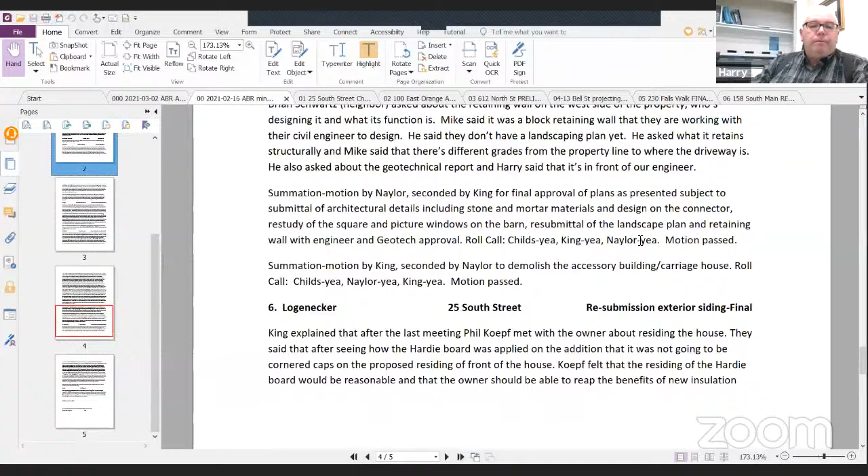Okay, resubmission 25 South Street, our siding issue. I have no new information on this. Hopefully folks had a chance to get down there and take a look at it.

I walked around it with them, and they're very nice people. They bought an old house and really don't accept that to a great degree. There are some problems with the siding, some rot that I saw. I don't think we have a picture of the rot that I saw, which was on the southeast corner. Yeah, I don't know if I have that up. Yeah, I don't remember a picture of it, but it was there when I was viewing it.

There's some peeling paint. The issue that bothers the owners primarily is the paint, the repainting and the seeing of previous paint jobs, and not the greatest job anyways.

I feel the need to enlarge on this because there are several questions here. Historical significance is determined by the Architectural Board of Review and nobody else. We get input from other sources, certainly prospectus, but we determine what is historically significant and what is not. I will say, and as I did in a letter a week or two ago, each dwelling or submission is an entity unto itself. No two are alike. It should be treated as such.

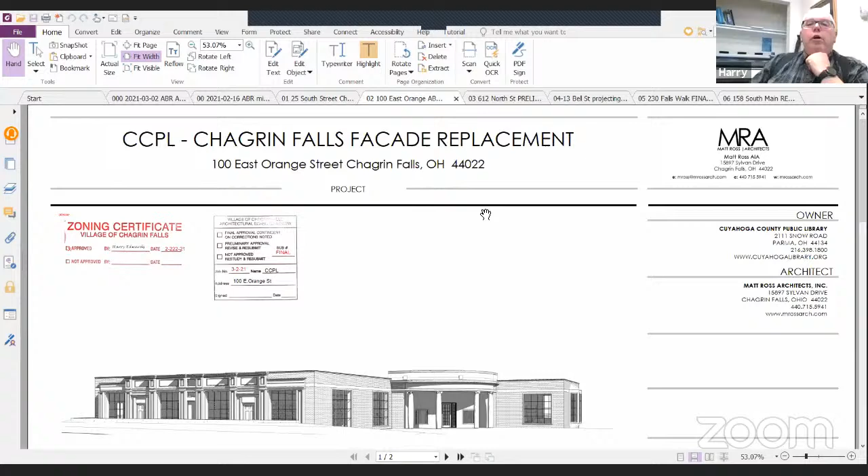100 East Orange Street, the library. Good morning, everyone. Good morning. Morning, Matt. So not much really has changed. I'll just kind of go through the project again to refresh everybody's memory.

The north facade of the library — over the years we've tried to paint it, remove the rotted wood. It just kind of keeps coming back, largely due to a lot of moisture in that area. And it does not get the sun like the rest of the building does. So we want to replace that in kind, identically, with the AZEK PaintPro, so we can paint it to match the existing.

Library standard, and they're going to be painting the rest of the wood trim as well, so we're going to have a match. I did approach the library about your wishes about replacing as much as possible. It's just not really in the budget right now. Over time they would like to — that's the plan.

What do you mean by replacing as much as possible? Replacing the wood trim with the AZEK, other than the north facade, on other parts of the building. Visually, it's not going to be distinguishable. So I mean, I think that's really up to them and how they approach it over time. If it's not rotting now, keeping the older wood seems like a fine plan for the moment.

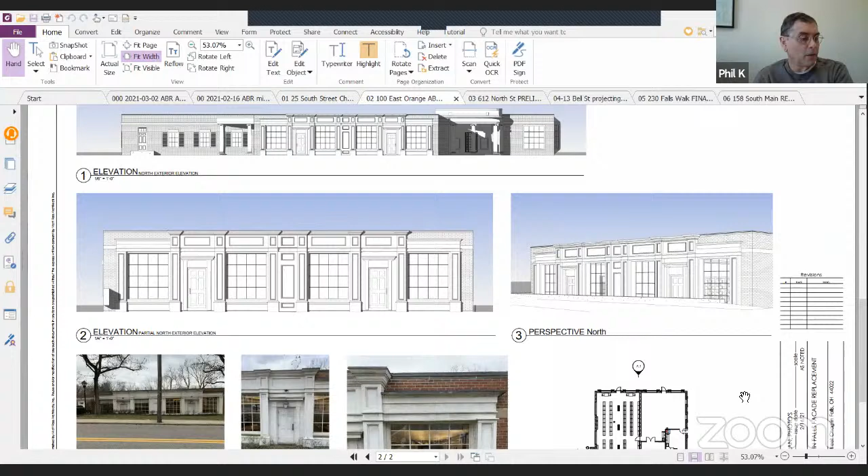I remember when Holtzheimer designed this, and thought it was way overdone, but in order to match it, I don't think you can do it in AZEK. I think you're going to need to do it in Boral trim that's custom made, or come up with some details so we can see sections through those pilasters and through the cornice. I don't think the sills are all that important, because it looks like it's original. Yeah, the windows were not going to be part of this, or the doors, just any trim surrounding it. I agree with Phil's comment.

Well, they're good, they're taking it all down. Okay, so it will be all new. Because I thought you were just replacing certain parts or pieces, not the whole thing. No, the entire thing's coming down and it'll be all brand new. This facade is all new, right?

This north facade is complete replacement. Yes, that's correct. Man, such an opportunity to just tear it all off and return it to the 1950s design it was. Save them a whole bunch of money.

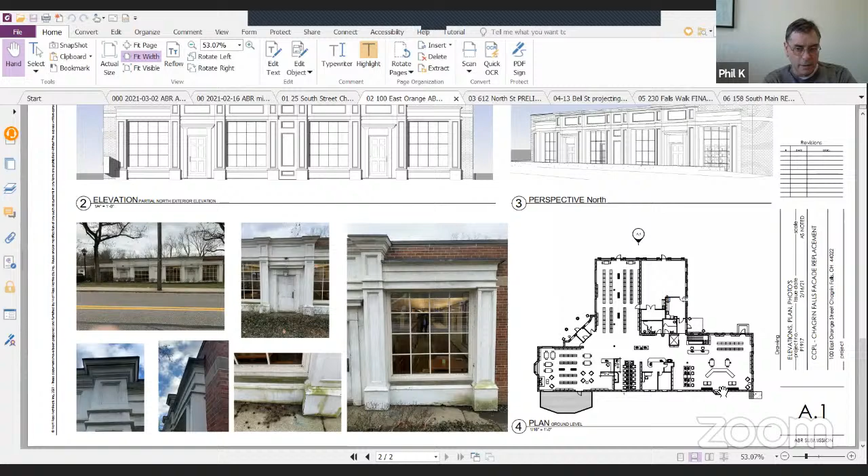I have one other issue. Around the corner, on the northeast entrance, the columns that they installed were too long, and the base of the columns - they used wood columns - and the bases have collapsed and they're rotting away. They didn't cut the columns and put them up on pedestals to allow the wood to breathe, and it's failing. Maybe not completely yet, but...

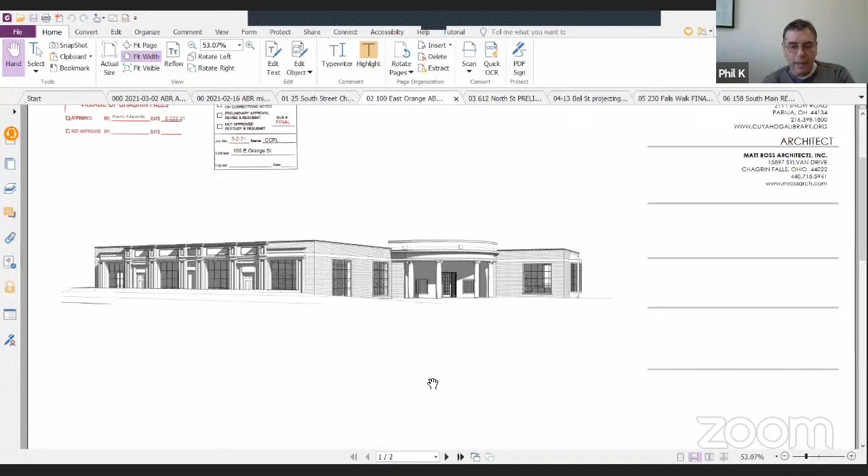If you've got the library's attention, Matt, you need to point that out, and that should really be raised in terms of their priority. I will definitely make them aware of that. I think that's the other side you're talking about, correct? Right, it's the secondary entrance, not the original main entrance. And what happens is the water slopes right towards that entrance.

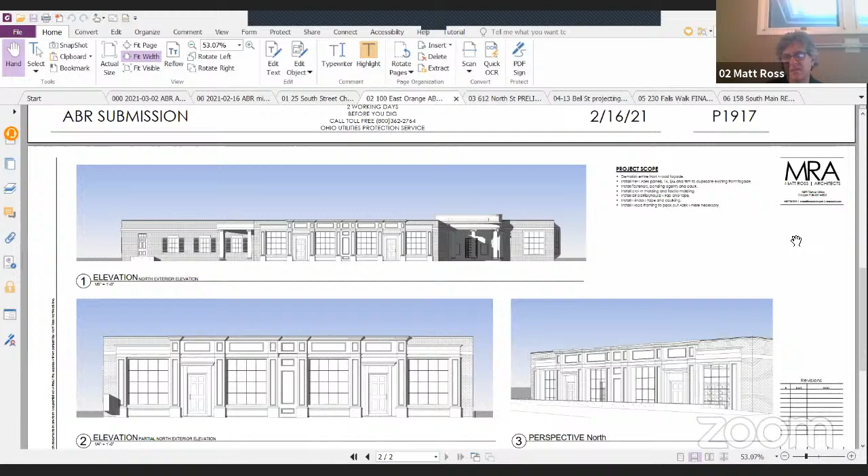We have a trench drain there now. Yeah, but it's not going to do the job. That's always been there, so it's not helping. Badly installed posts or columns is more the point. You're pointing out, giving them AZEK feet so they can withstand the water. Well, aluminum feet would be better - that'll lift it up and allow air to get into that column.

I agree with Phil's comment - would they entertain that instead of having this overdone front facade? It might be better, I'll bring that up. That would actually save them a ton. Never even thought of it that way. I was under the impression... I would think a visit to the Historical Society might get you an image pretty readily, or a call to John Borso.

I think that's a great idea, bring it back to what it maybe was - subtle, understated details. This thing's so much in your face, there's so much going on. It should be a little more understated, a little more subtle, instead of so many columns and entablatures, and they're not even correctly done in the entablatures and things. It's kind of out of proportion and out of whack.

I think they might have that original facade. Is the window to the right of the front entrance more typical of the look? Just with a stone band running over it? Yeah, really simple. All brick.

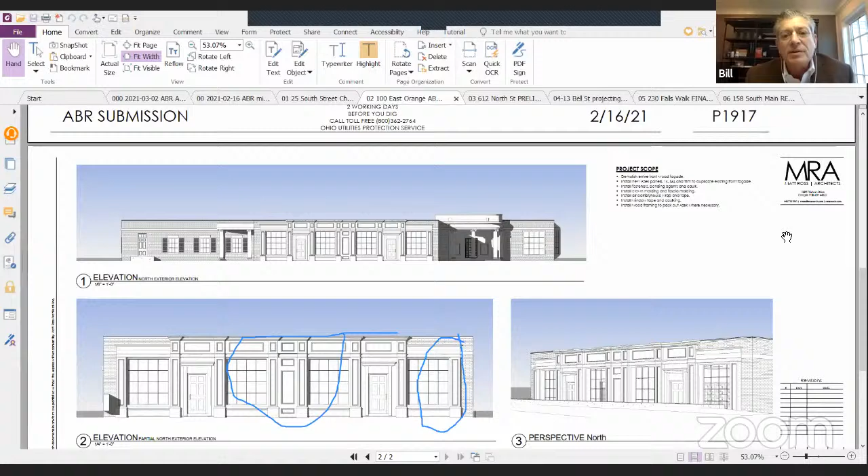If that's the way the building was originally, there you go. If it's all coming off, if you could talk them into that - I would love to see it come off and just see, okay, this is what we've got. How can we address whatever issues there's going to be - there's going to be brick damage, there's going to be all kinds of stuff that has to be addressed because you've now stripped off all that. So that's an interesting process.

I mean, they're going to have to pull it off anyway if they wanted to replace it. But to see what's there and see what we can do with that facade, and then compare it to what's left with the original facade.

I like that idea. I don't know about the rest of the board, but I would be in favor of granting permission to do the demolition so that we could all take a look at it. I agree, because they've got to go there anyway. So you could go ahead and open it up and see what you've got going on, get some images. Perhaps you want to add your own touch to it. We'd have to take a look at it.

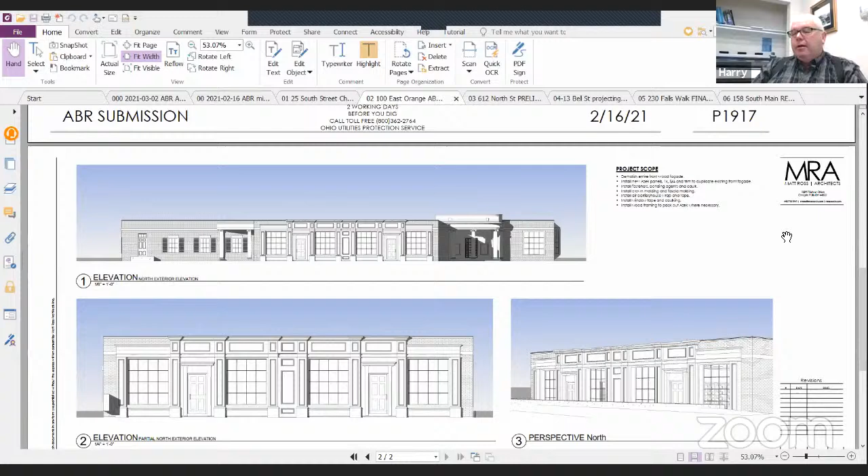So who made the motion - I think that was Steve. Steve made the motion, Wendy seconded it, okay. Motion by King, second by Naylor. Childs, yes. King, yes. Naylor, yes.

Okay, Matt, also remind them that I did have a complaint from a citizen about the condition of the library facade and stuff. Wait until he rips it all off - that'll be front page news. I did tell them that, I absolutely did. Okay, I definitely know, so the neighborhood's watching, okay.

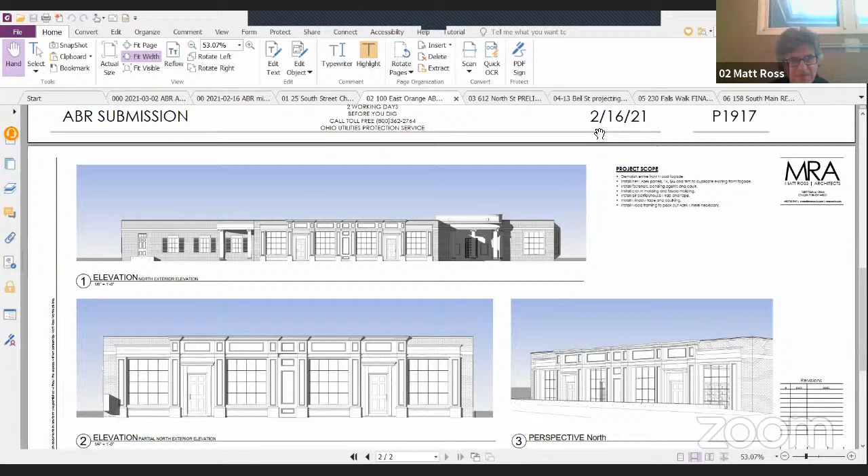612 North Street. Right, this is one of my projects.

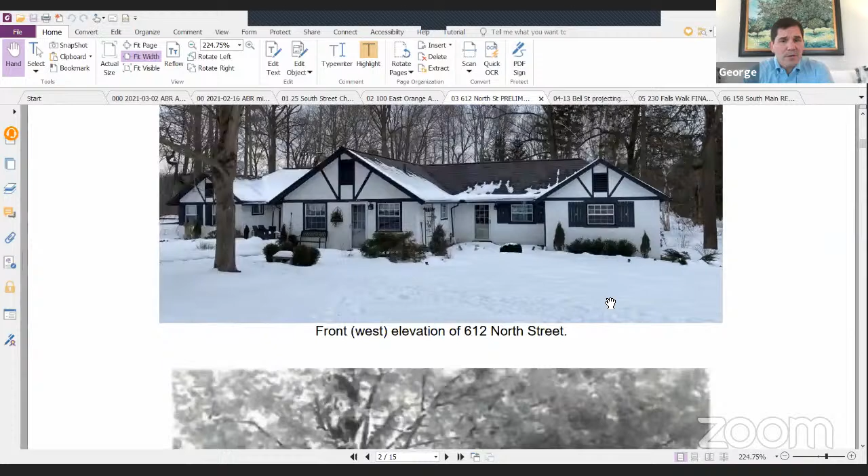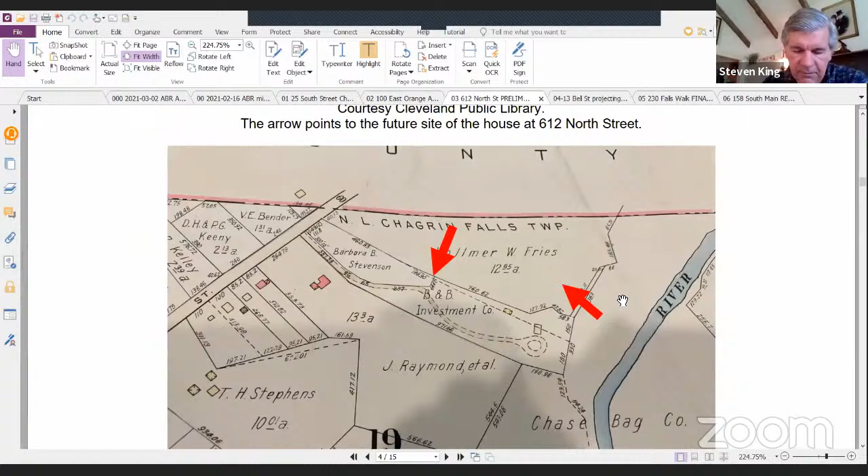Perspectus did a study. This is down a private drive - there's like 4 to 5 houses on a shared driveway. This is one of the furthest back houses, so it's a little trip to see it. Yeah, there's several of those North Street driveways, multiple driveways. It's interesting back in there.

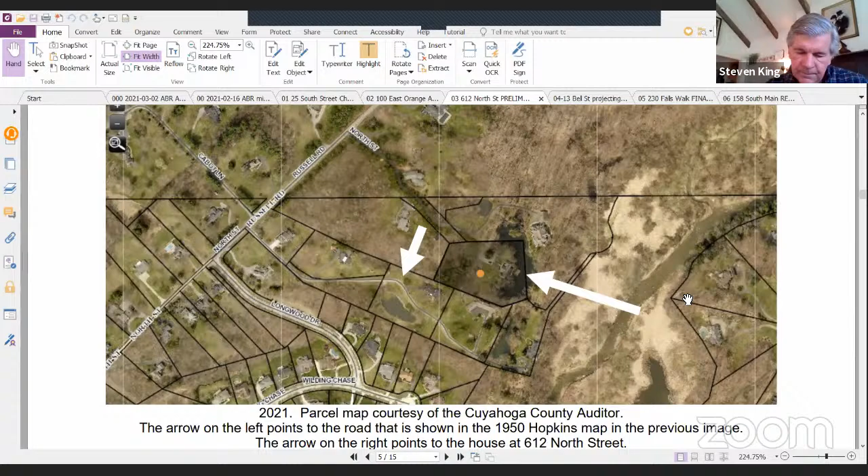Perspectus did not find that the property at 612 North Street had historical significance, and therefore they concluded that the changes would not have an adverse effect on that structure or any historical structures in the area. It's a straightforward report.

I move to receive the report from Perspectus. Second. Motion by King, second by Naylor to accept the Perspectus report. Naylor, yes. King, yes. Childs, yes.

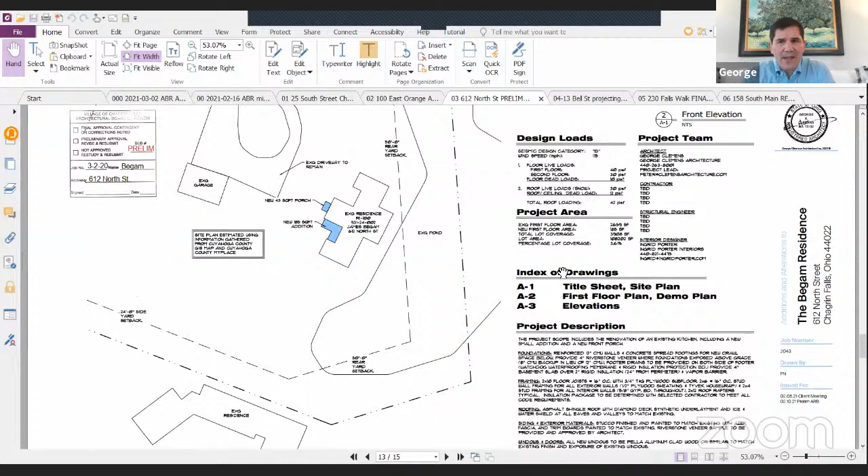Well, I don't think what we're doing faces that neighbor across the pond. That's a large newer house built about 20 years ago, right? Yeah, I think they may have talked about it, but I'm not positive. That seems like it would be a good idea. When the trucks roll in, neighbors get excited.

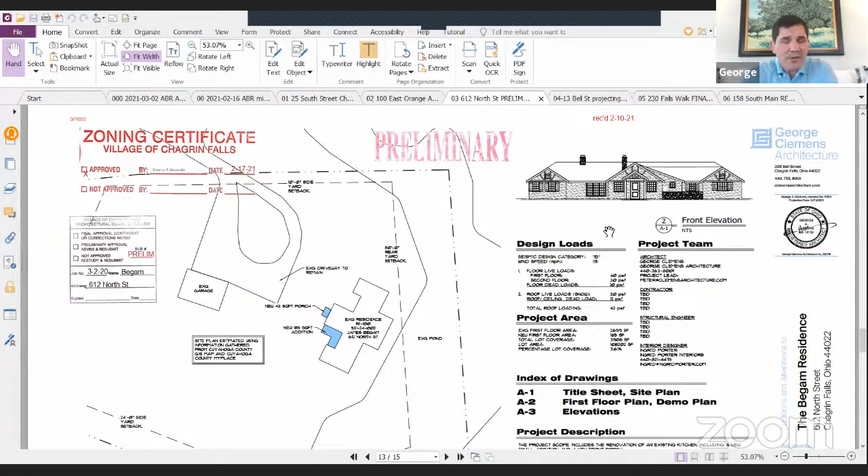We have practical issues to solve with this house, and the primary one is that there's really a one-room combined kitchen. You walk into this house into a one-room combined kitchen. It's got an open stair down to the basement, a little powder room right there, and it's not very large for the kitchen. There's no mudroom function, no porch, no protection. It's really just a door on the front, and the door's actually off-center a little bit with the gable.

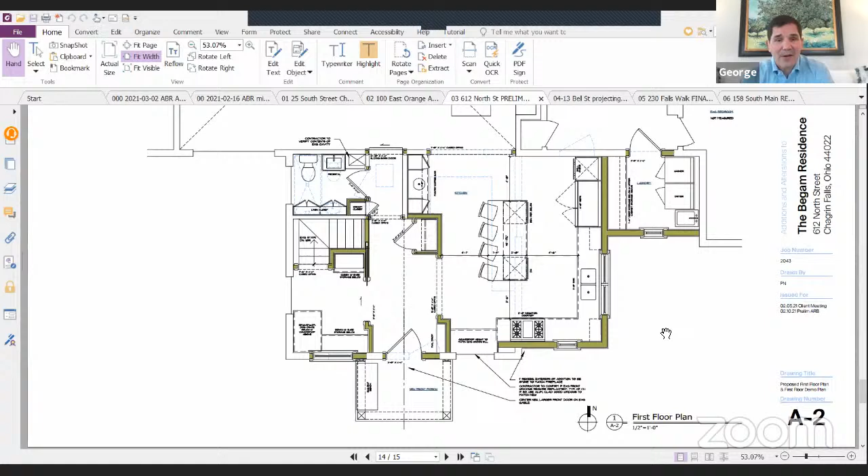That's something we're trying to address and clean up. That's the existing front elevation. So that's really the only way into the house—your driveway's above the house, behind the house is a pond, and the only way in is through that front door. The upper drawing shows a kind of not-quite-symmetrical front gable end. So we're trying to more successfully deal with all those functional issues, and also create a more symmetrical, hopefully pleasing front facade.

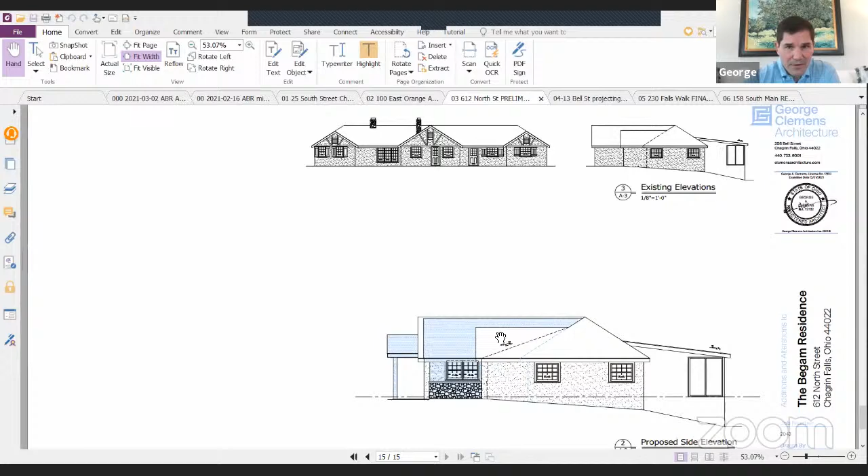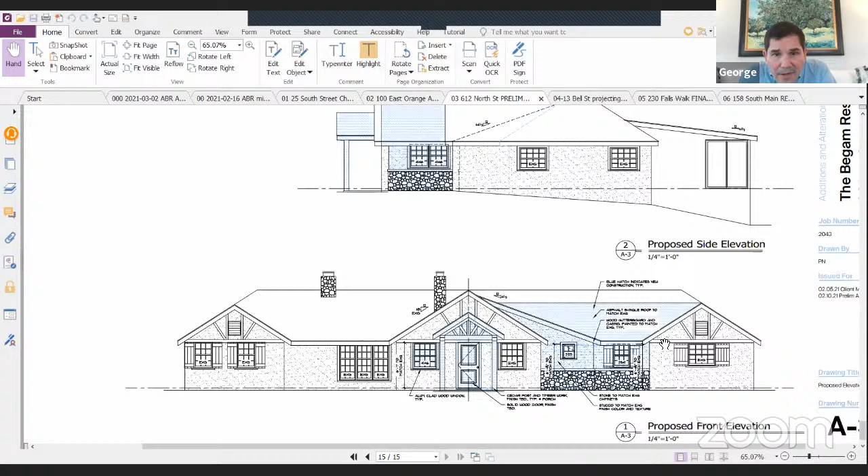We've added, behind that front gable, a kind of wraparound shed dormer, filling in an alcove in the plan to give more kitchen area. If you go down a bit, there's the new front facade in that area—the windows are now symmetrical, the door is on center. We have a kind of timbered front open small stoop that respects the concepts of the stucco and timber house. We're showing a lower stone and upper stucco addition, but you're still reading those three front-facing gables, and we're using that addition to get a more accommodating kitchen, but also to separate an entry hall—an actual little mudroom—so it's not plopping your shoes right into the kitchen. And that's the size of it.

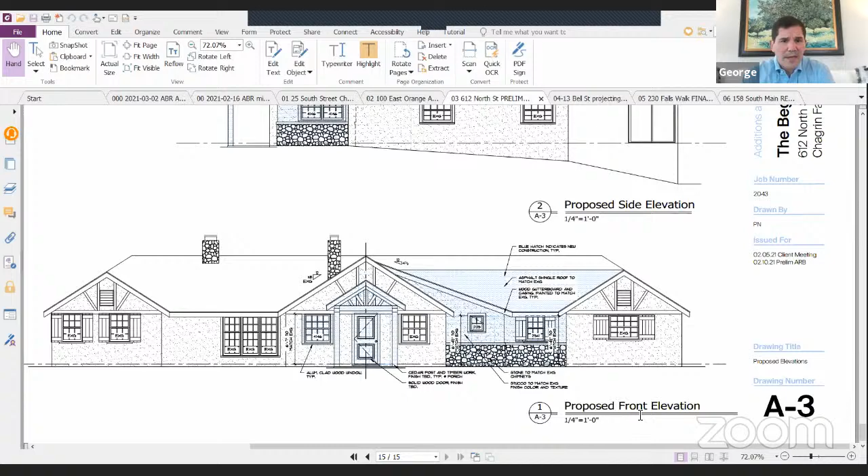Where's the garage? Is there a garage attached to the house? The garage is up the hill. Oh, it's a detached garage? Oh yeah, it's detached, about 50 or 60 feet away. Yeah, but you have a circle that's closer, so really if you're parking there, you're parking at this circle. Yeah, you'd go to this. This is preliminary—it's a front addition, so we wanted to show you the concept.

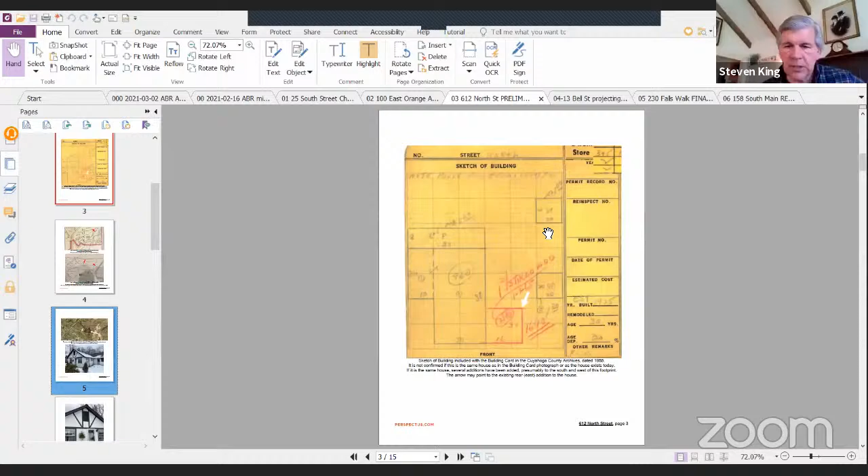I don't think we have a real good detail on the garage, but I guess it would show on that Google Maps site plan, or one of those. It's not very rundown—well, sorry, I mean it's really out of the picture. In terms of composition, it really reads like a very separate outbuilding. Okay, quite a ways away.

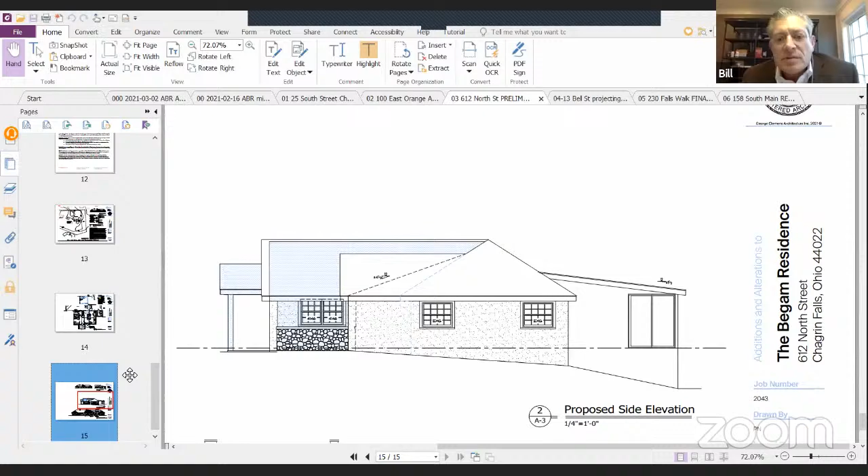So when you look at this, could you go back to that initial existing elevation front? Well, you could keep it on this, this is fine—so this composition. Wait a second, hold on. Okay, oh wait, maybe you can get the garage. Oh, yep. Is that what you're looking for, Bill? Yeah, that's fine. So this composition is pretty doggone symmetrical.

You have even hierarchy here, you have this nice reverse gable, you have a link here, and a link here, and what I call these is subordinate to the main part of this front facade, and you have these two bookends. So overall it's a nice, simple composition, and I think you did a great job, George, lining this door up, putting this gable—I think that's excellent. I know this is probably a struggle because the kitchen's there, and how do you get this kitchen within this space? My only concern is from a massing standpoint—this roof and this fill-in, and then with this stone, it seems like your eye's going right to that, and it's kind of losing the simplicity of it.

So the only thing I would say is maybe get rid of the stone, and is there a way to make this a flat roof so it almost disappears? That way you can still read the strong volume and still read these two bookends and the link, and this almost becomes understated, so it doesn't detract from the overall simplicity of the composition.

And I totally get that. We're actually trying to vault - they really wanted height in that kitchen, so we're vaulting under that lower gable, lower shed roof massing, so that the vaulting concept is running into... I think we've created that as a subordinate.

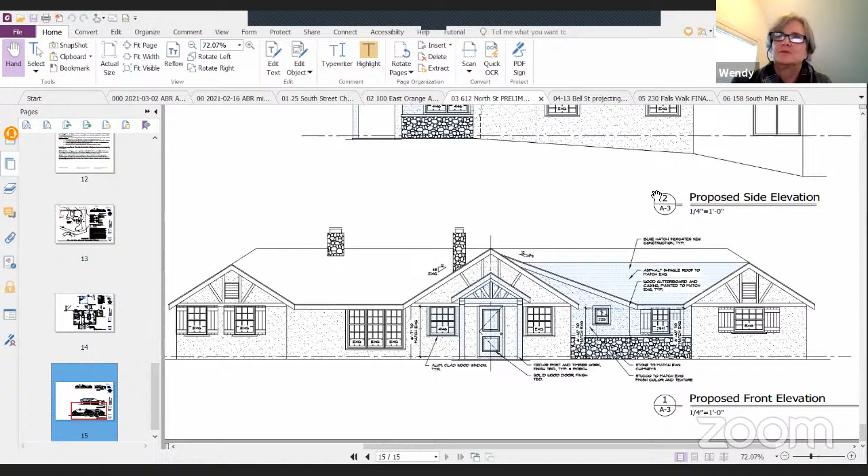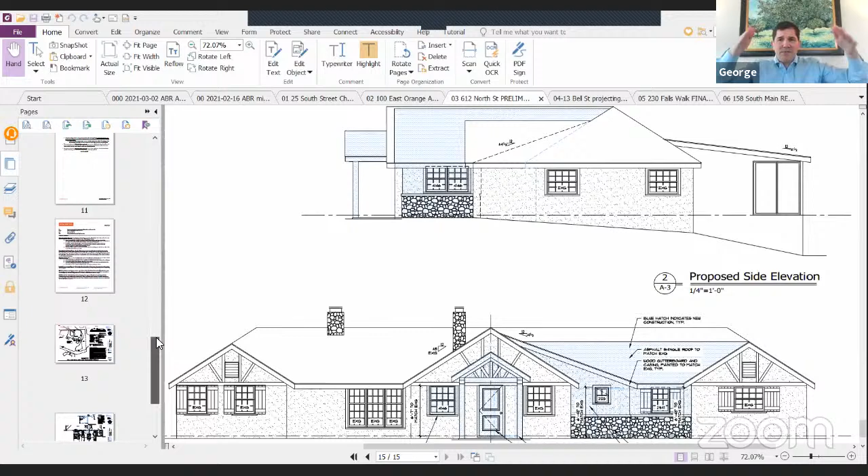Is that thing sticking out the back a porch or something? You're looking at the existing drawings? That's the shed. We may not have drawn that totally accurately—it's really strange, actually a flat roof with a little teeny sloping roof edge condition. You can see it in a picture. We're not hitting it right now, but I think it's a little mansard on the back there. Teeny little mansard—well, that was appropriate in the 60s, I suppose.

The room is nice, it's right on top of the lake, it's got good interior features, but it is not perfect outside. That's for sure.

So, motion to revise and resubmit with attention to facade, shed roof, and removal of stone.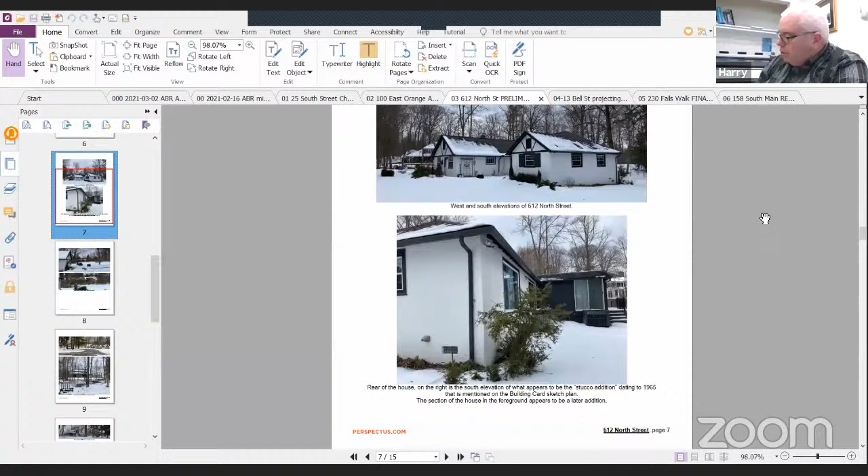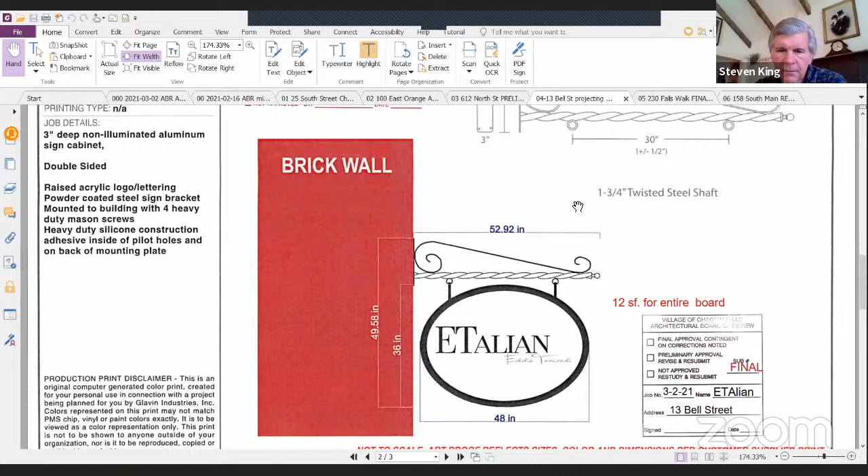Okay, a little signage at 13 Bell. Looked good to me. I had a question about the projection on this.

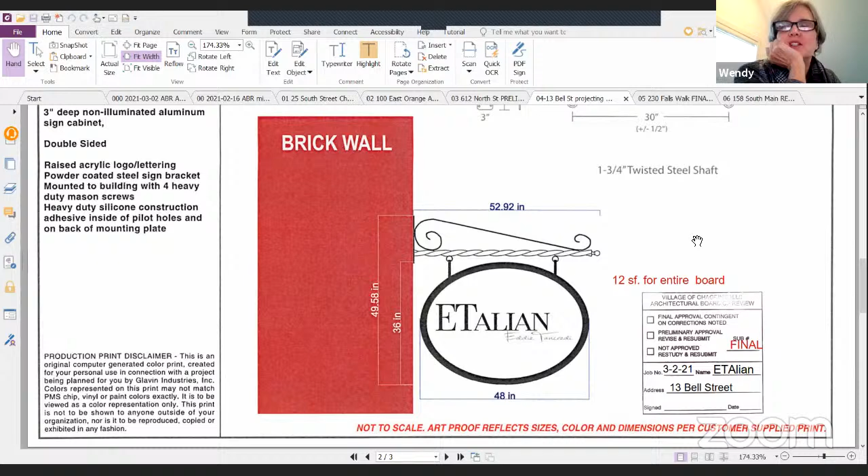Because it's not to scale, I just want to make sure—I'm having a little issue translating the scale of this when it's installed, because Mario's, it's this little building, it's a smaller building, and the sign projects quite a bit over that sidewalk. Does anyone else have that concern?

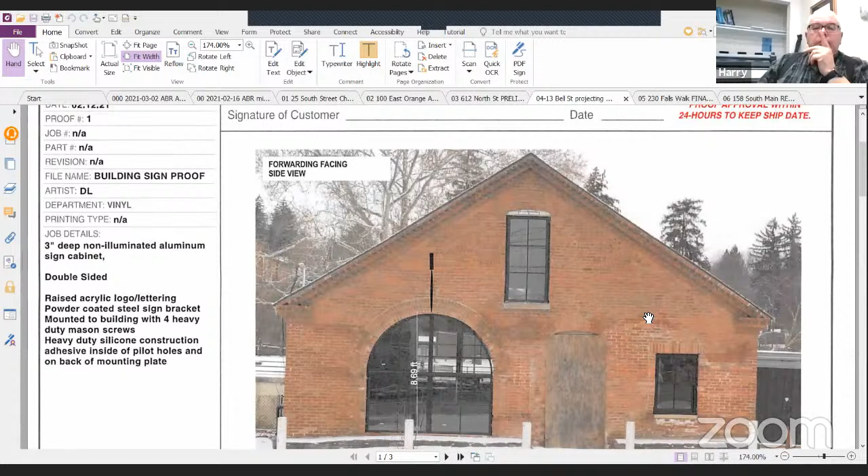I was just curious where exactly it is on the building. Did they show that? Yeah, it's right over that arch. Oh, okay, I see, it's up pretty high. All right, so it's high, I don't think it'll be too big.

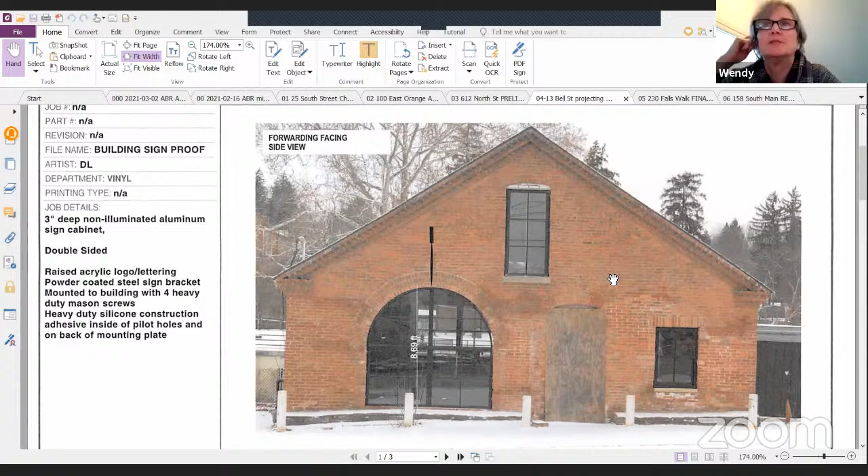And I just wanted to discuss that a little bit—you can practice calling it Eddie's instead of Mario's. Okay, I'll work on that. How do you pronounce that—Italian? Yeah, Italian. The chef and owner's name is Eddie Tancredi, so that's where the ET comes in. Oh, I see, okay, quite cute.

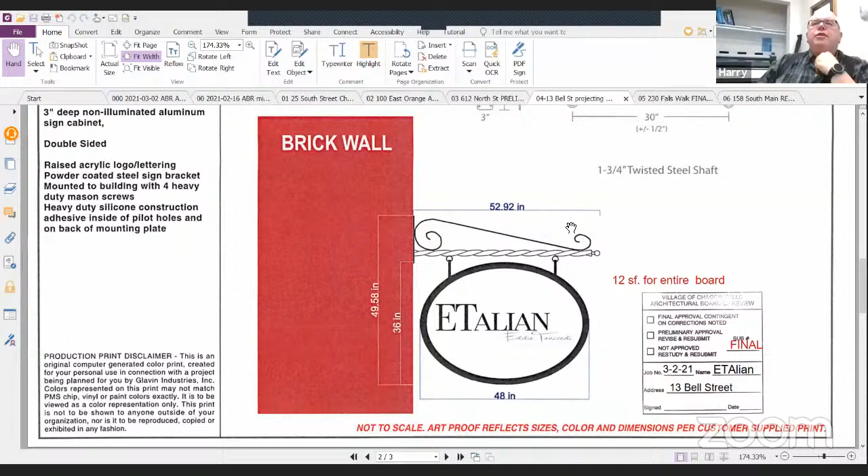Does the owner have anything to say? Hold on, can you guys hear me? Yes, you can. Just identify yourself for the record. Yes, I'm Eddie Tancredi.

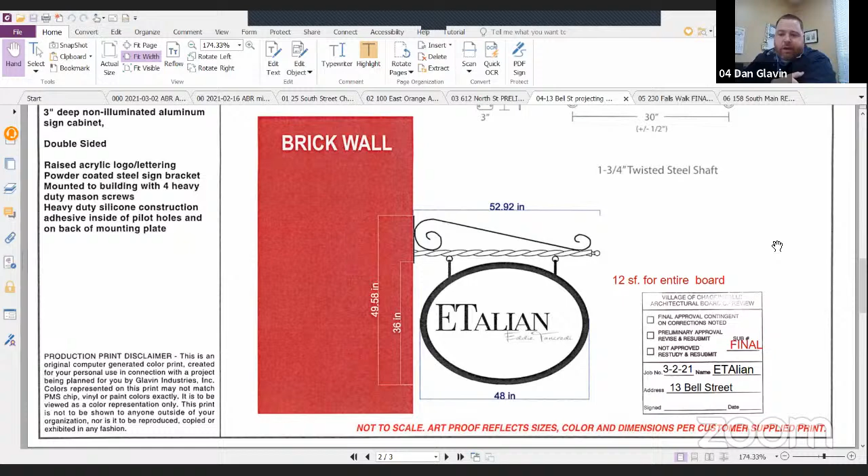I think what your question was addressing—it is higher, so it won't be interfering with the sidewalk. I'm excited to see that building come back to life. Yes, nice to see progress. At that height, I think it needs to be as big as it is, otherwise it will kind of get lost.

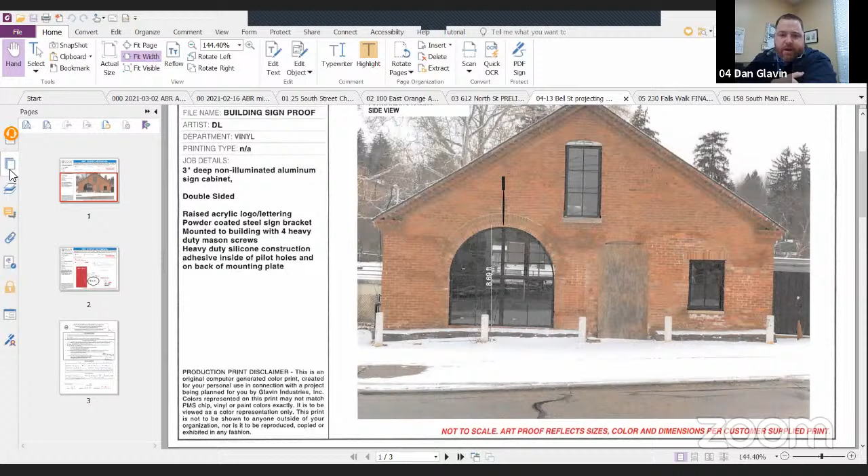There's also the bollards in front of the building that poke everything out, so I don't expect it to stick out any farther than that anyway, which isn't really on the sidewalk. I think the only other thing to note, which was kind of difficult to show in the drawings, is that the bracket will be solid black. We wanted to show the detail in the bracket, so we just outlined it in black, but it will be powder coated black.

Okay, Eddie, you have thousands of people listening—what will your fare be when you open up? We will be doing a true Naples style pizzeria. Oh, neat, that's great.

So everything's coming along. The health board and the state approved all of our plans, so we're really able to dig into the final steps right now. It'll be wonderful to see this building come back to life. Oh, yeah, absolutely agree.

I love the location. I mean, I'm originally from Solon. I still live in Solon now, so it's just going to be good to be back in the area where I'm from. Good, welcome, look forward to it.

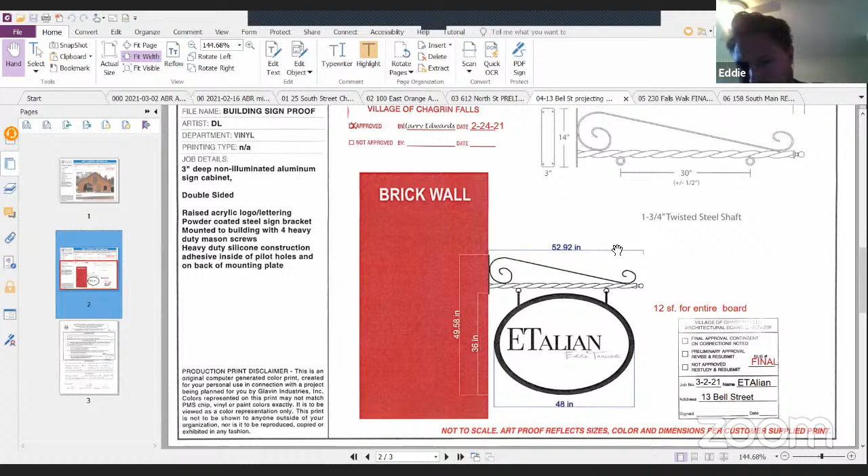Eddie, could I get the spelling of your last name please? Yeah, it's TANCREDI. T is in Tom, A is in Andrew, N is in Nancy, C is in cat, R is in radio, E is in Eddie, D is in dog, I is in igloo. Okay, thank you.

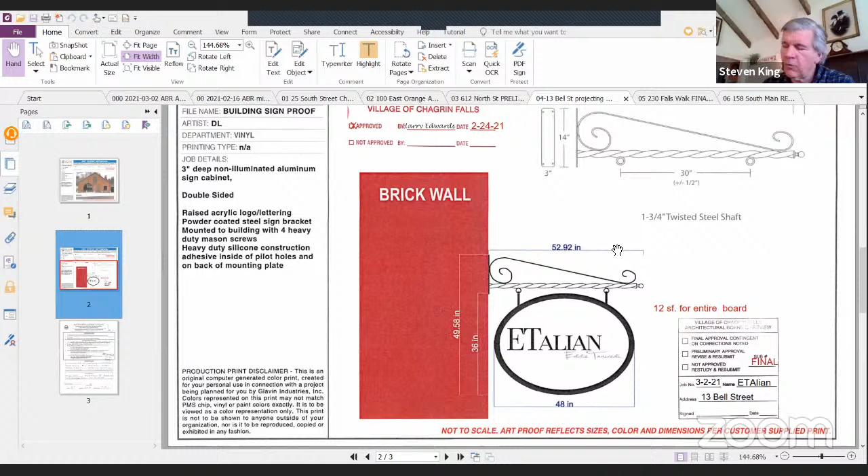Do we need a motion to vote? I move to approve as presented. Second. Motion by King, second by Naylor. Childs, yes. Naylor, yes. King, yes.

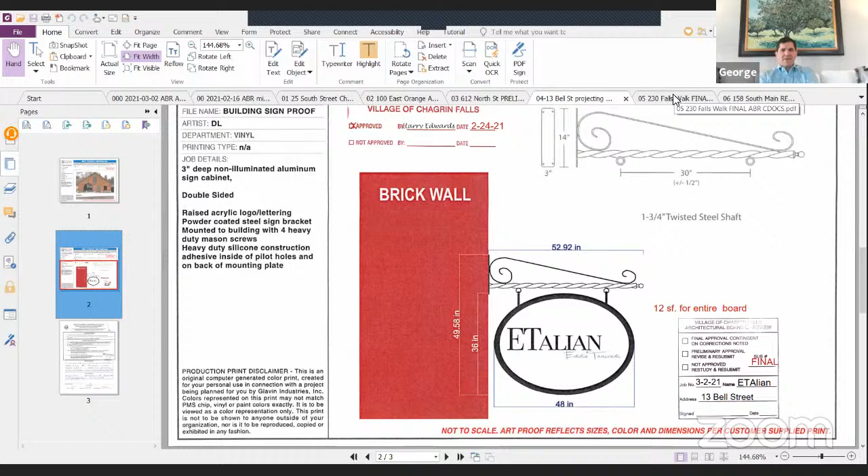Thank you, folks. Thanks, guys. Best of luck. Thank you, looking forward to the soft opening. Excellent, me too.

230 Falls Walk, new dwelling final, hopefully.

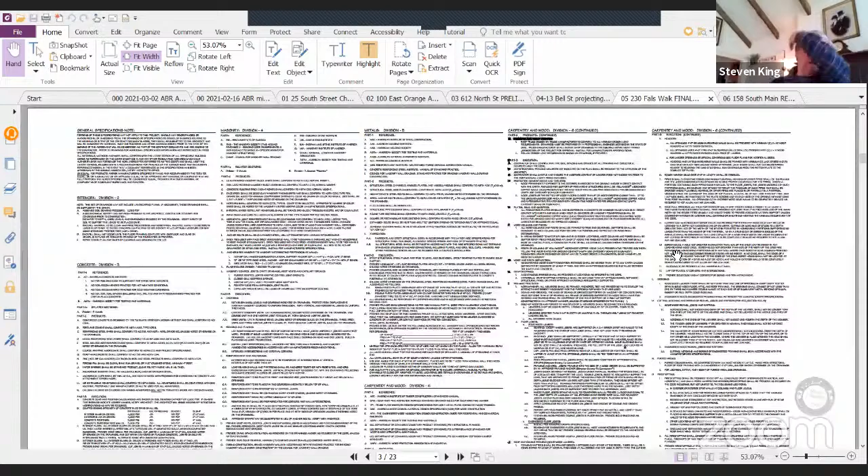Morning, everybody. Morning, Rick. So you guys have seen this before. If I'm not mistaken, this is the last house in Falls Walk to be constructed. Last time it was approved as noted, with the focus being on that dormer up in the roof. We had a gable there previously and agreed to take a look at it as a shed. We'd done that once and discarded it, but went back to it and decided it was in fact a better look for the front of the house, so we made that revision.

The garage doors are more of a carriage style, I think we talked about that too. And I think that's pretty much it, so we're here looking for final approval.

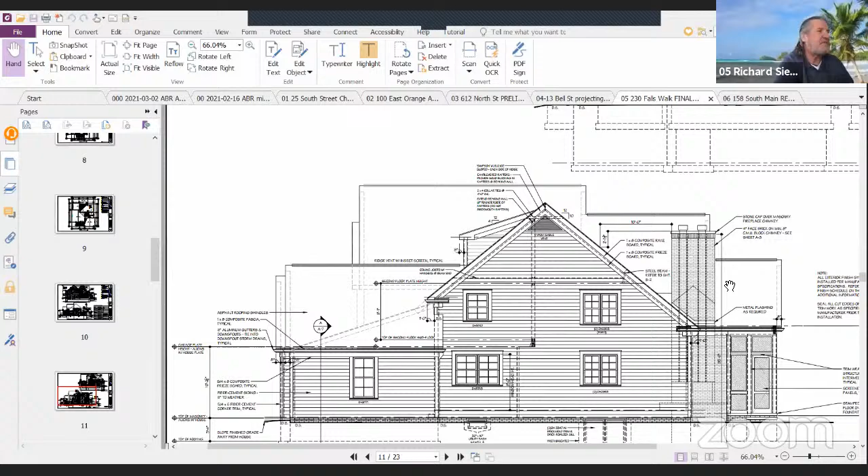Oh, there was an issue with a garden wall in the back that has been removed from the plans and will be addressed during the landscaping presentation. So it's not part of your approval, the patio or the wall around it.

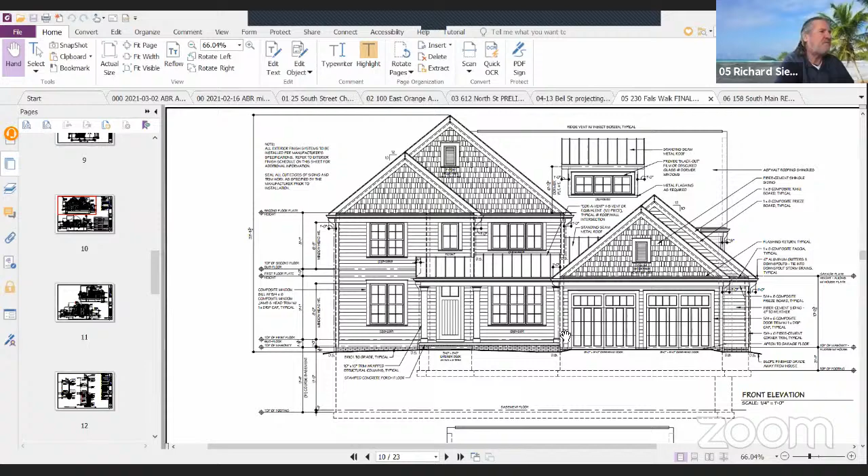Or at least the wall. Is that front door the final front door, or just a CAD/CAM type of door? No, we want to do something like that with a board look. It kind of fits the neighborhood and the style of the house. It's not a ton of glass, but it lets some light in while still giving you a little privacy.

These houses are pretty close to the street, so we don't want all glass everywhere. Yeah, I think it...

I kind of like how the front door and the garage doors reflect each other's general configuration. I like the new look on the garage, I think it softens things up.

You're refreshing my memory there. I think we had a triangular vent up there; we put in two louvered vents, rectangular, to match each other. Yeah, I don't have any further comments.

I'm fine too. Last house in the neighborhood, right? I think so, yeah.

Okay, we got a motion and a second. Motion by King, second by Naylor. King, yes. Childs, yes. Naylor, yes.

Thanks, Rick. Hey Rick, does that tree behind you drop any coconuts? What's the deal? No, not yet. Well, that's just my virtual background, that's where my head wants to be. Unfortunately, I'm sitting at my desk in Chagrin Falls.

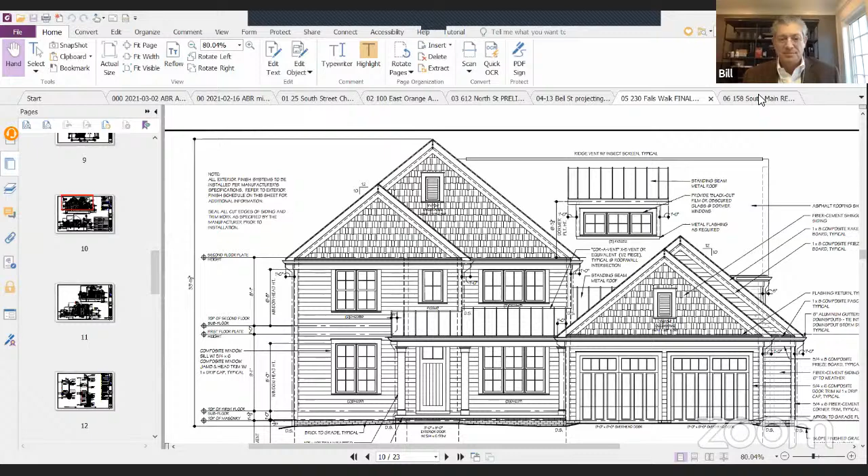Okay, all right, thank you. Thanks, everybody. Thank you, best of luck with your new house. Thanks.

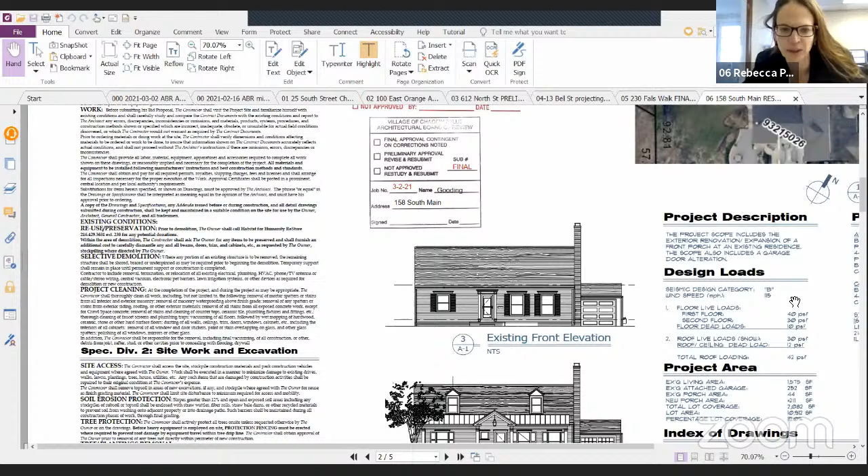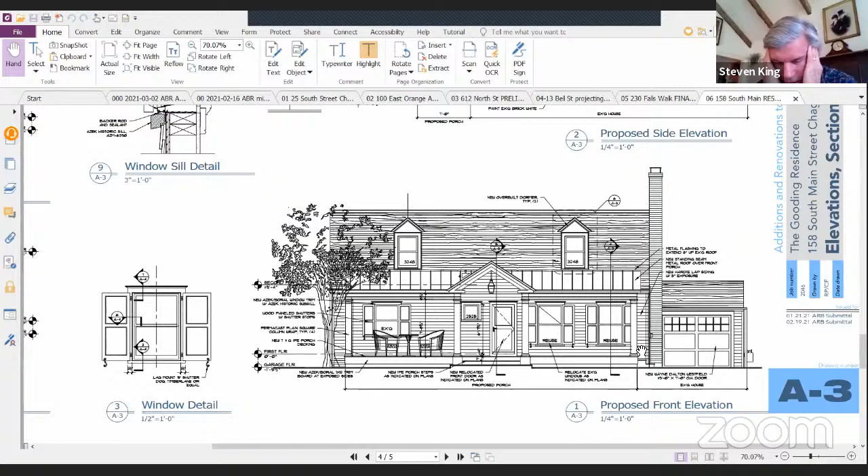Front porches should be porches, not decks. Yeah, but the time and space available is very limited. It's a small house, not to be confused with Monticello. I'm looking forward to your changes, Becky.

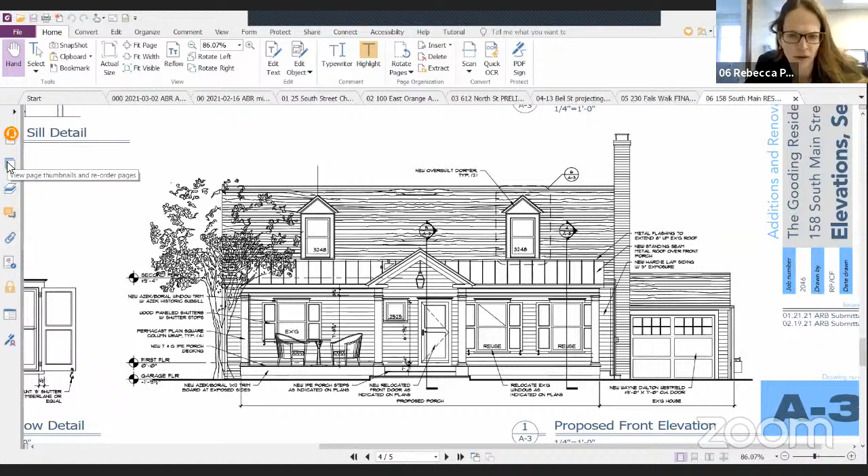I'm sorry to interrupt, go ahead. No, I appreciate it. Like you said, it's a small house with large, poorly detailed trim. This thing has evolved, and I think they're doing an exceptional improvement to it. I think we did get caught up in the details of trying to create a classical composition, and I respect your comments, Bill, but at the end of the day, we're trying to do a nice, simple, clean front porch.

And this is what we're presenting. It's asymmetrical, it's harder than it appears. It's an asymmetrical existing composition, more like a 3/4 cape.

We went back and studied, and I think George, you mentioned making the columns a little bit bigger. We did that, and we did study adding two columns per Bill's recommendation. But I felt that from the homeowner standpoint, they don't want to look at a bunch of columns, and you're going to sit on one side or the other. More importantly, from my standpoint, it really highlights that left window being in a somewhat awkward spot, so it's almost like we're forcing it to be very symmetrical, and it's not. I've moved and pushed and pulled everything I possibly can with the homeowners to try to make you guys excited about this improvement.

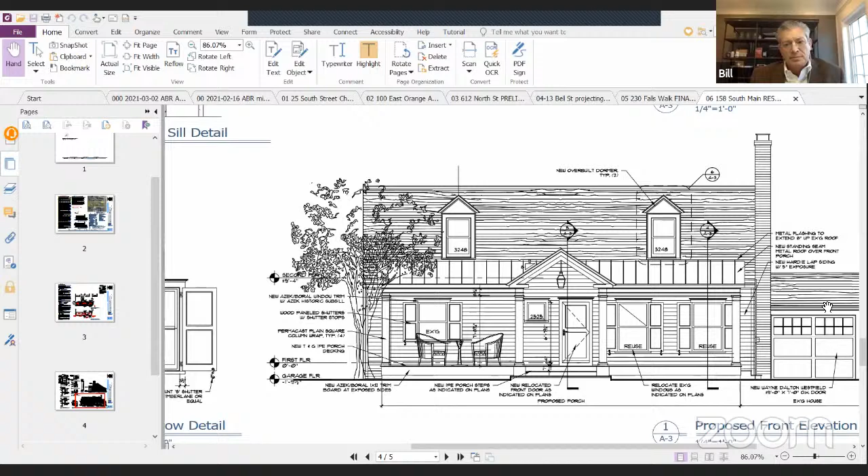Motion by Naylor, seconded by King. Childs, abstain. Naylor, yes. King, yes.

Thank you. Thank you all. Enjoy your porch. Thanks, we will.

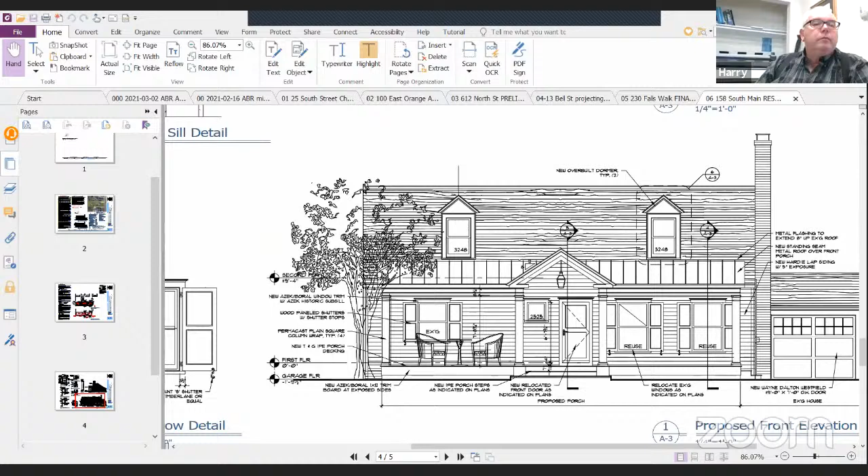I had one comment on that porch we just had. I don't know if anyone recognized this, but when you study a row of houses next to each other, you do what's called a streetscape and look at all the facades. When I took your advice, Steve, I went up there and took a look. With that porch in front, that house is the furthest house towards the street, if I'm not mistaken, along that whole street. If someone loses control of a car, they're going to end up on your front porch. I was surprised that planning and zoning approved that, because usually you want to keep all the facades fairly accurately in line.

So I was surprised on that. I think it falls into the cheating a little bit category. I mentioned to Wendy, although I didn't have the gumption to say it in the meeting, that if you want to hear rain on the roof, you could just get a Weber grill and put it in your front yard. Yeah, that's true. Always the practical one. Way to bite your tongue.